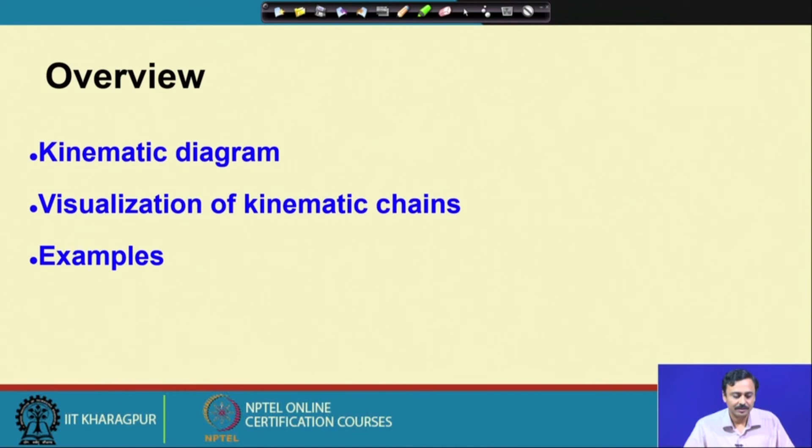So, what is a kinematic diagram? A kinematic diagram is a schematic line diagram showing the arrangement of links and their interconnections. We are not too much interested in the shape of the link, how it is put in, or what kind of dimensions the link might have. These are not of much importance in a kinematic diagram, but what a kinematic diagram does is reveal the kinematic chains that go in making a particular mechanism.

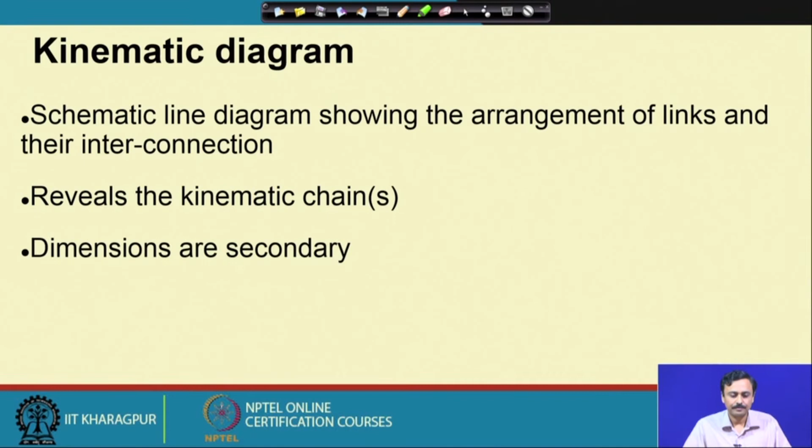As I mentioned, the dimensions and shape of the link are secondary. What is of primary importance is to have a line diagram which clearly brings out the different kinematic chains, that means the connection between the links and the kinds of links, whether singular, binary, ternary, etc., and the kind of kinematic pair that is present. So, that is a kinematic diagram.

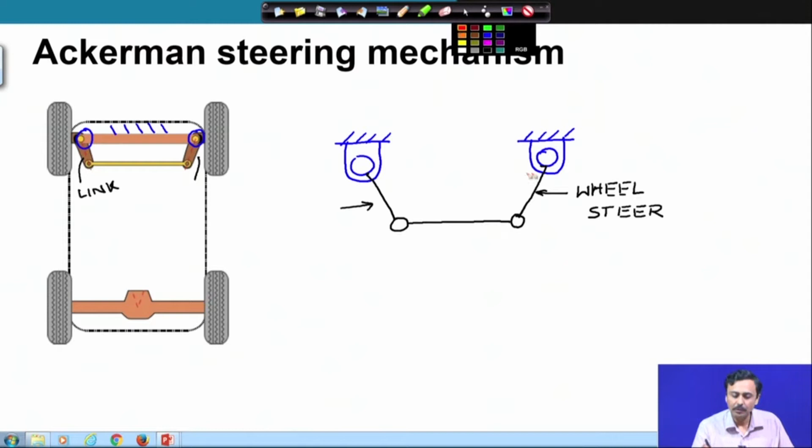Now here we are going to number the links. Remember that ground is a link, so this is the ground link, and we will number it as 1. Always we will number the ground link as 1. This steering link as 2, this coupling link as 3, and this steering link again as 4. So there are 4 links.

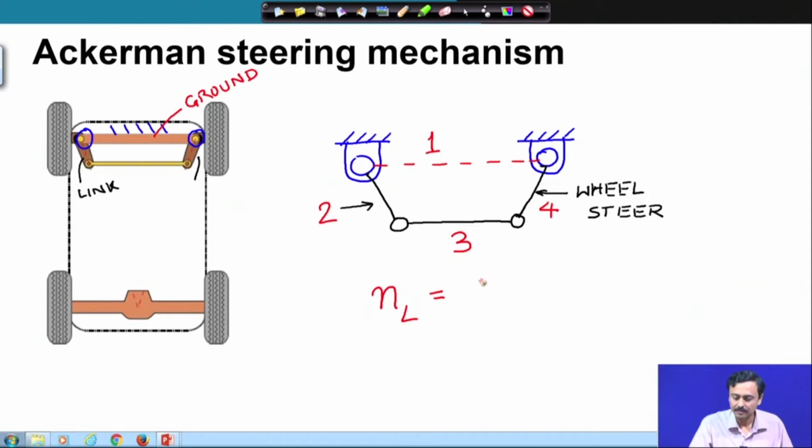So we will write number of links as 4, and the kinematic pairs: this is one, this is one, this is one, this is one, and all of them, as you can see, are revolute pairs. We will write number of joints also as 4. So, this is the kinematic diagram of the Ackermann steering mechanism.

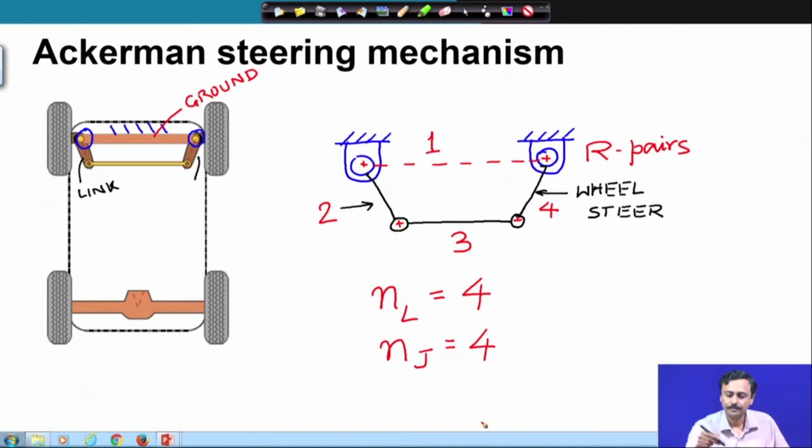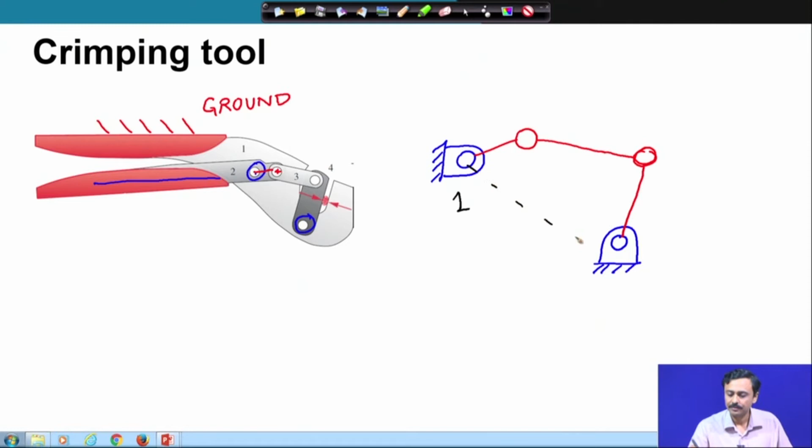Now, here again I am going to number. The ground is numbered as 1 as always. This is 2, the coupler is 3, and this is link number 4, which actually does the crimping operation, as you can see.

So here, number of links equals 4. Number of kinematic pairs: this is 1, 2, 3, 4, so number of joints is also 4. So, that is the kinematic diagram of the crimping tool.

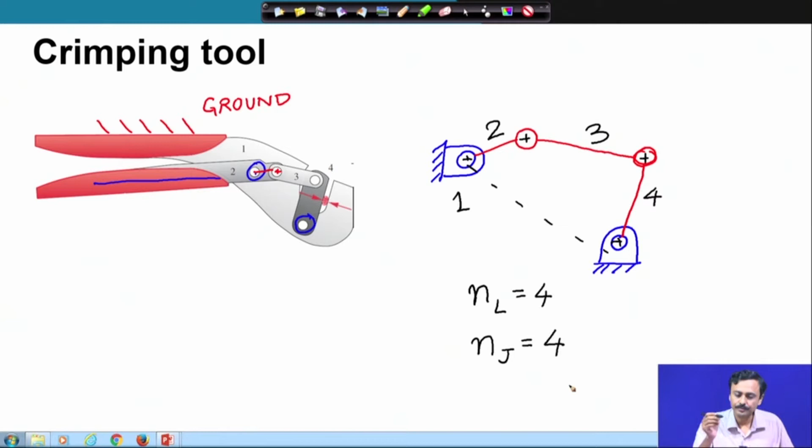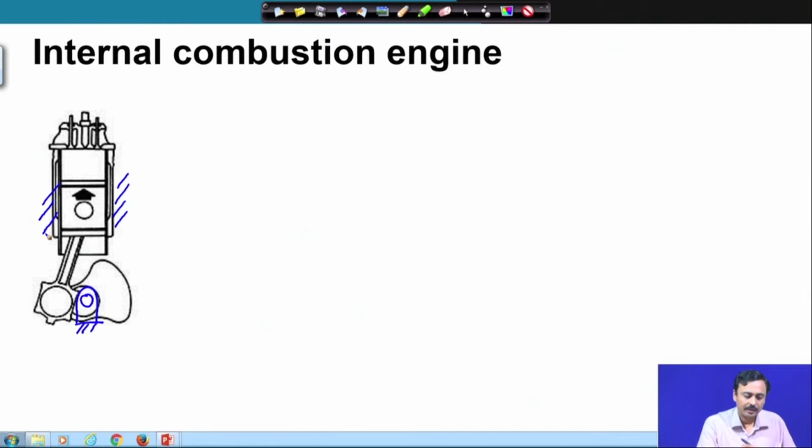Next we come to this internal combustion engine, which I have shown you by a schematic diagram. Let us draw the kinematic diagram. Now, here you have a ground, this is the crankshaft. So that is a ground, and the other ground is the cylinder, in which this piston is moving.

So we have this slider on which there is a kinematic pair, a pin which is guided in this slot fixed to the ground. This is connected by this connecting rod, and finally again to the ground, which goes to the crankshaft.

So here we have a prismatic pair and 3 revolute pairs. So we have 3 revolute pairs and 1 prismatic pair. Let us number them.

So ground is 1, the crankshaft is 2, the coupler is 3, and the piston, remember, is another rigid body. It is a binary link, as you have one revolute and one prismatic sliding. So this is another link, the 4th link. So again there are 4 links, as in all the examples we have seen.

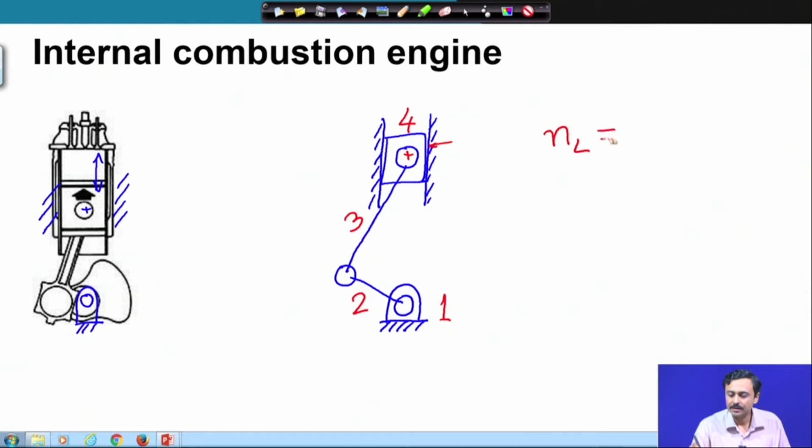So number of links is equal to 4, and number of joints, as you can see, is 1, 2, 3 and 4. So there are 4 kinematic pairs: 3 revolute and 1 prismatic. So sometimes we call this a 3R 1P kinematic chain. In the previous examples they were all revolute, so that was 4R. Now here this is 3R 1P.

So this is the kinematic diagram of an internal combustion engine.

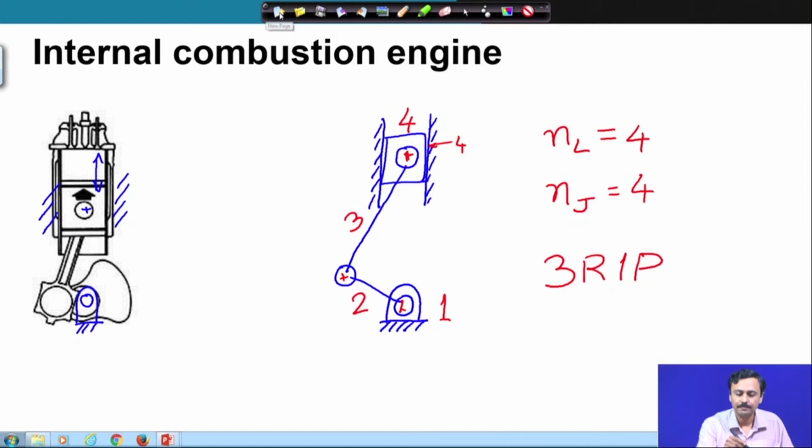Next we come to this surgical tool. Now we need some details of what is inside this, because it is not visible. So let me draw this. I have to first select a ground. Now this handle remains static with the body. So this is the body, this is a cylinder, a hollow cylinder through which a rod passes, which transmits the motion of the surgeon's finger to the output motion.

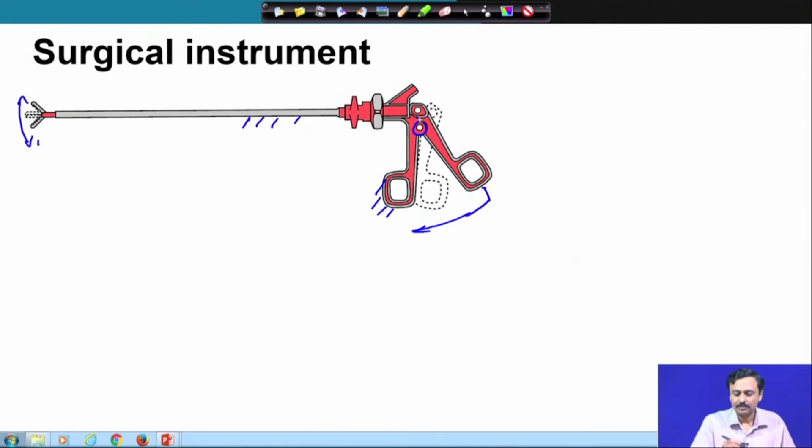So we will fix this handle as the ground. This handle is an integral part with this cylindrical barrel. The thing that can move is this grip. So as you can see, there is one ground hinge here, and there is one hinge, as you can see, which can move.

This hinge is moving, it is rotating about this ground hinge. So therefore I must be having a link, which is this link, which is rotating about the ground hinge. So this is my link.

Now to connect it to a rod that passes inside this barrel, there is a rod that passes, that takes motion from here to the end point. This is connected by another hinge to this rod, which moves inside this cylinder. Remember, this is our hand grip. This link is the hand grip, and there is this additional link which connects through another revolute pair to the rod that transmits the motion.

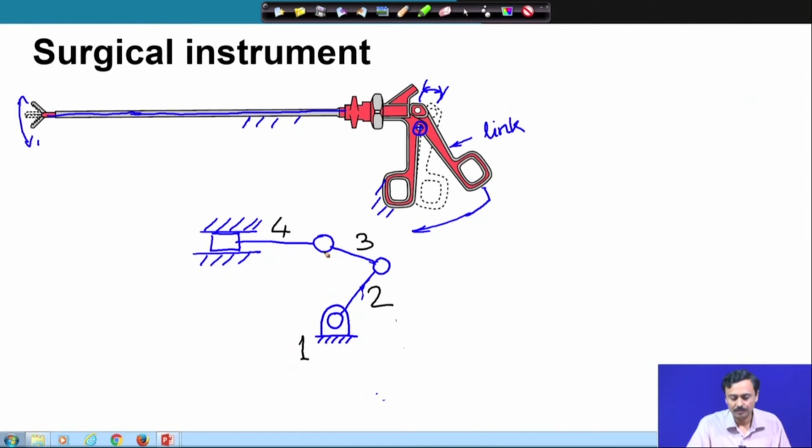So let us again count. Ground is 1, this handle link is 2, this coupling link is 3, and finally this rod is 4. So again we have 4 bars, number of links is 4, and number of kinematic pairs, number of joints, is again you can count 1, 2, 3, and 4.

So again this is a 3R 1P kinematic chain.

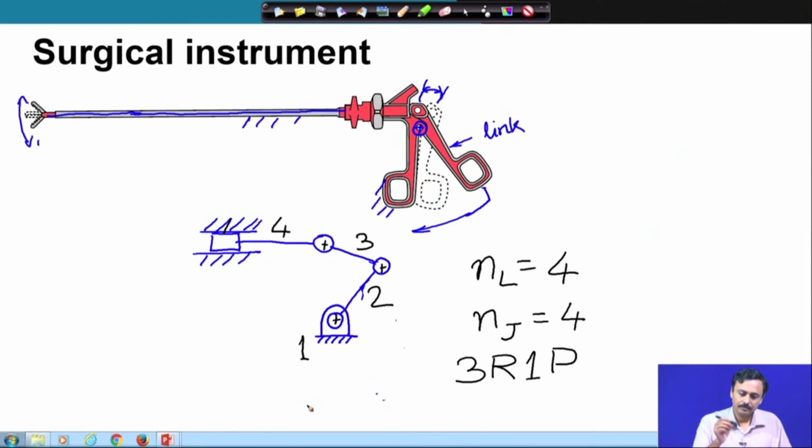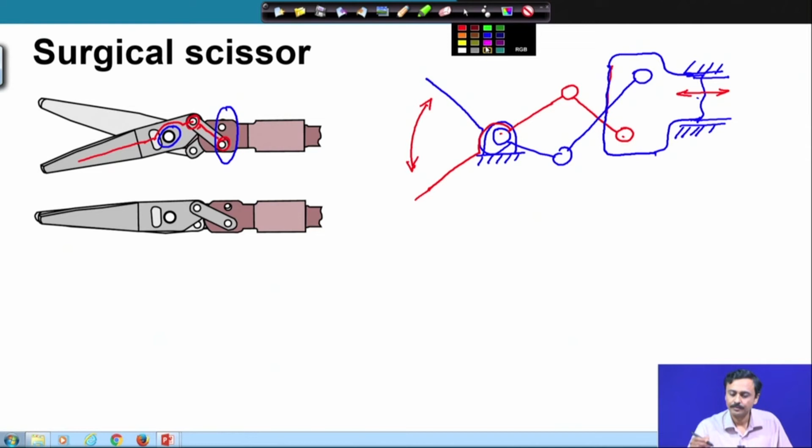So let us count. Ground is 1, this blade is 2, this coupling link is 3, this slider is 4, this coupling link is 5, and the other blade is 6. So now we have 6 links.

And how many kinematic pairs? Between link 2 and ground there is one kinematic pair. Between link 6, which is the other blade, and ground there is another kinematic pair. Now here we need to understand this. Kinematic pair, as the name suggests, is between two links. It so happens in this case that there seems to be only one hinge where both the blades are connected to the ground.

But since we are talking of kinematic pairs, we must identify two links which form the pair. For example, between 1 and 2 there must be a kinematic pair, and between 1 and 6 there must be another kinematic pair. We should count them separately. So here there are 2 kinematic pairs, at this point there are 2 kinematic pairs. So we should count 2, 3, 4, 5, 6, which is the prismatic pair, and this is the 7th kinematic pair.

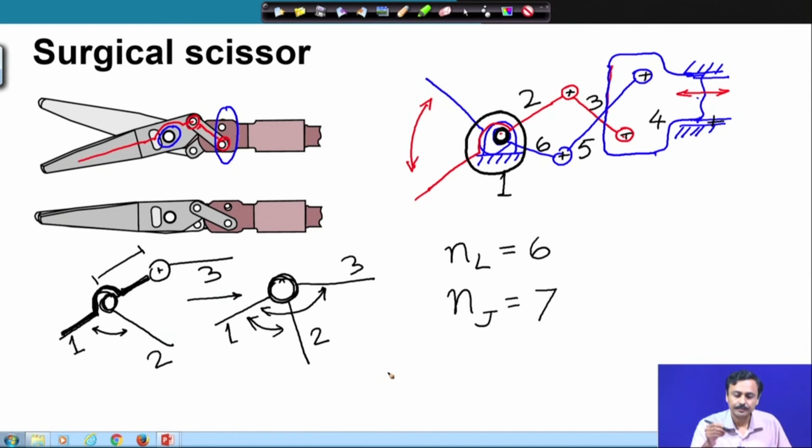Next, we come to this landing gear mechanism which we have seen. So, here let me point out there are, look at these 3 hinges, they are marked in red, they are actually attached to the aircraft body. We will fix the aircraft body, we will consider the aircraft body to be the ground.

So, we have 3 ground hinges. Now, to this ground hinge we have an actuator. Now, actuator is a prismatic pair, a powered prismatic pair, which we are going to represent like this. This is a prismatic pair, a powered prismatic pair. So, we are going to represent this, this will be our convention.

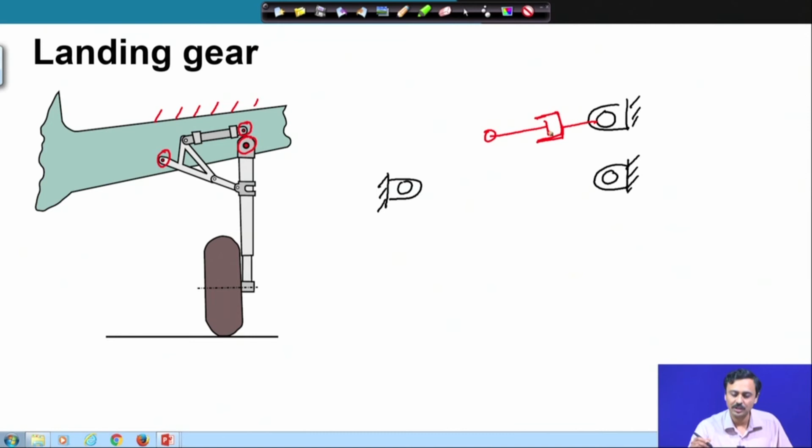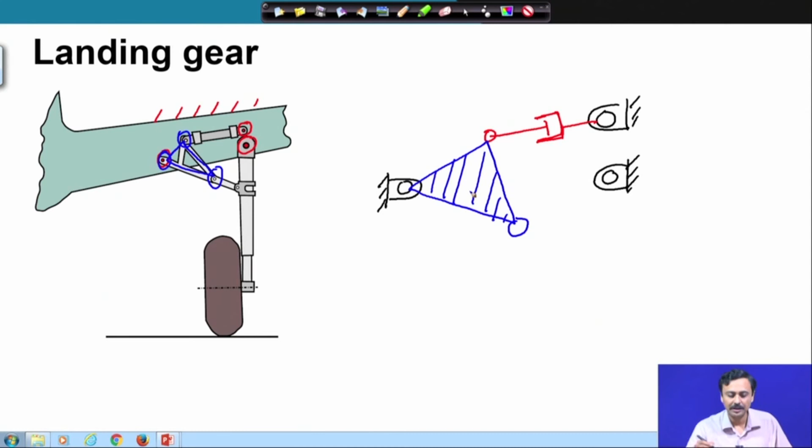To this is attached this triangular shaped link. You can easily identify now that this is a ternary link. It has got three kinematic pair arrangements. So, one is this, this and this. So, this is a ternary link. To this is attached a binary link, which is attached to the wheel.

So, again let us start counting. Ground is 1, ternary 2. Now, here the actuator is composed of two links, two rigid bodies which have a p pair between them. So, we count 3, 4. This binary is 5 and this binary is 6.

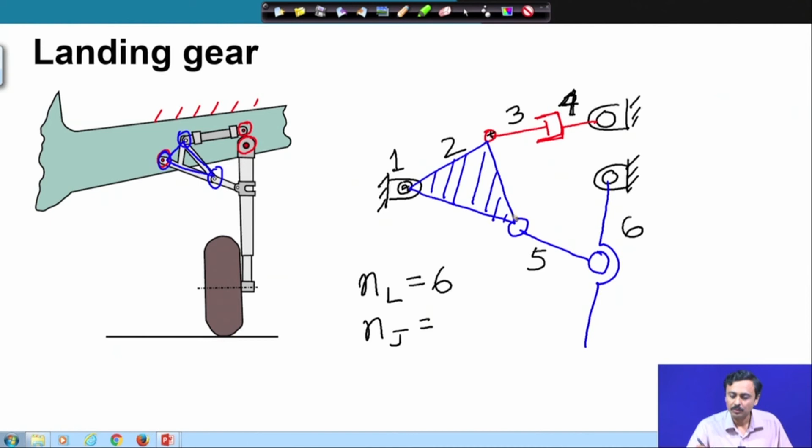So, number of links is 6, number of kinematic pairs: 1, 2, 3, 4, 5, 6 and 7. So, again we have number of links as 6, number of joints or kinematic pairs as 7. So, this is the kinematic diagram of the landing gear of the aircraft.

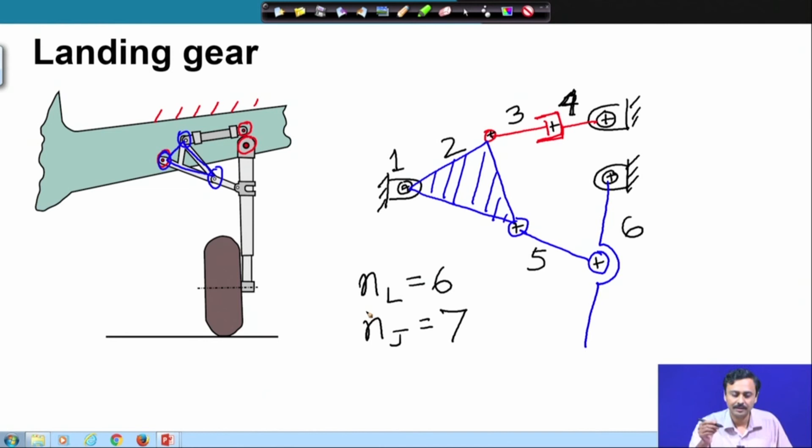Then we have this parallel transfer table, which is straightforward actually. I will quickly draw this. So, we have two ground hinges. This is connected to a ternary link and this one is connected to the ground. On this there is this link 6.

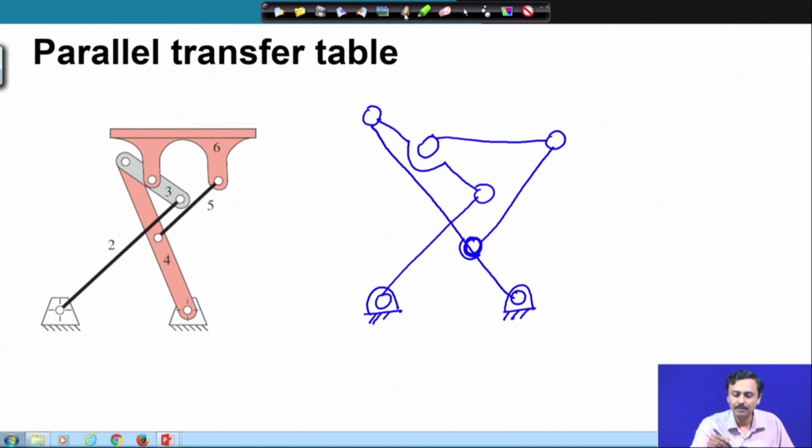Which is connected to, so this is also a ternary. So, this is the kinematic diagram of this parallel transfer table. So, if you count 1, 2, 3 is this ternary, 4 is the other ternary, 5 is a binary, 6 is another binary. So, NL is equals to 6, NJ: 1, 2, 3, 4, 5, 6, 7, again we have 7. So, that is the kinematic diagram of this parallel transfer table.

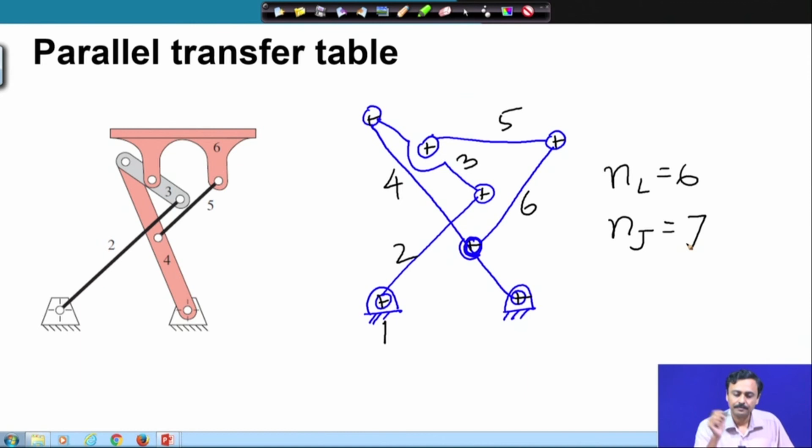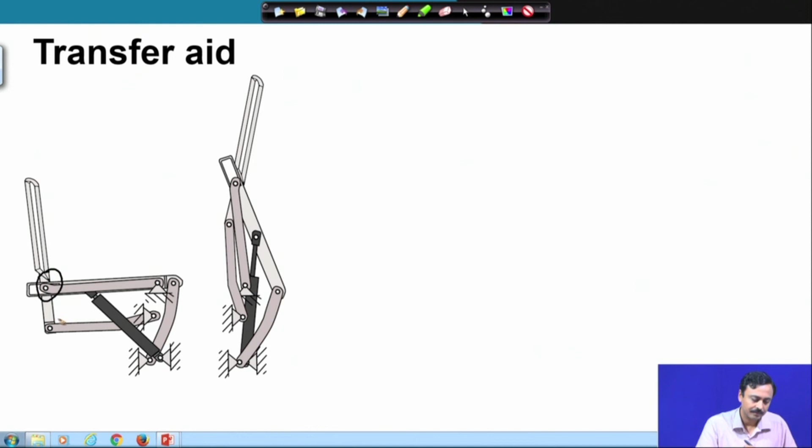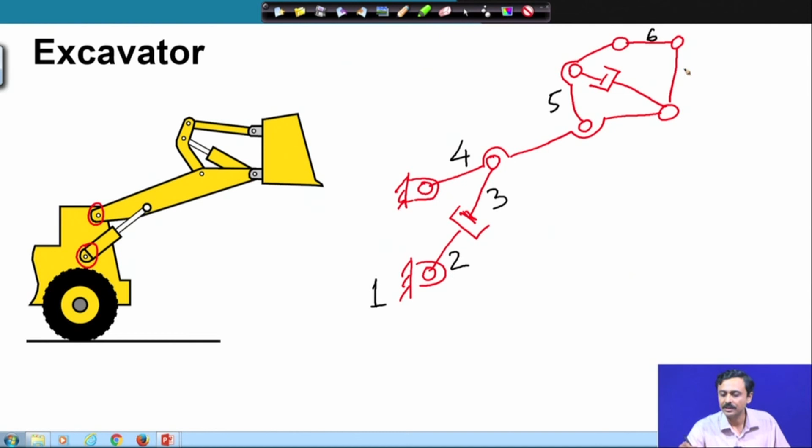Now, once again let us start counting. So, ground is 1, 2, 3, between 2 and 3 there is a prismatic pair. This quaternary is 4, link 4, ternary is 5, this binary is 6, this is 7, this is 8 and this is 9. So, number of links is 9, number of joints: 1, 2, 3, 4, 5, 6, 7, 8.

This prismatic is 9, and here again you see there are 3 links connected by one hinge. So, I must count this as 2. So, 9 plus 2 is 11. So, number of joints in this case, number of kinematic pairs is 11. So, once again note this kinematic, there are 2 kinematic pairs at this hinge. So, that is the kinematic diagram of the excavator.